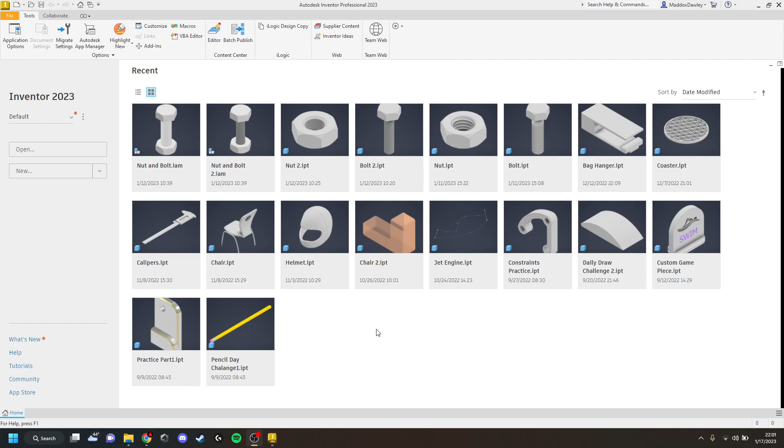I'm going to show you how to make a second nut and bolt assembly. This time it's going to be using the coil tool rather than the thread tool. So a lot of this is going to be super repetitive.

Again, you're just going to create a standard part in metric. I'm doing this in metric, you can do it in standard, but you've got to do your own math.

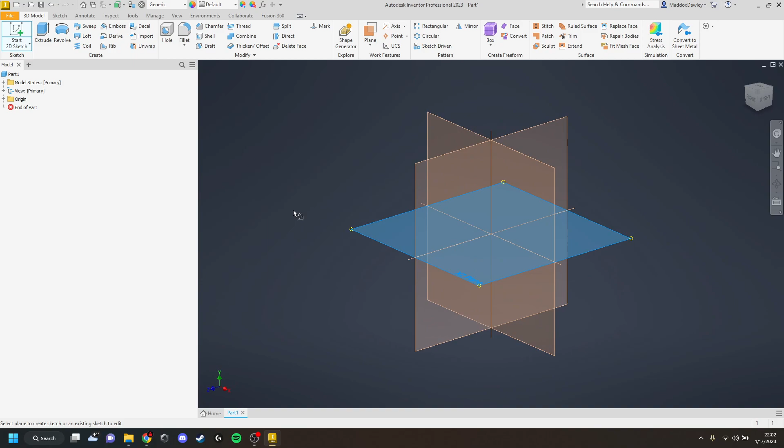So start a 2D sketch. Again, we're going to do this. We're going to make a polygon. Come in here. Cool. Done.

The dimension's going to be 19 millimeters. Finish that sketch, extrude it.

It's going to be 7.5 millimeters tall. Going to do a new sketch on the face, a circle. There.

Going to extrude, then yet again just through all there, and 45 degrees.

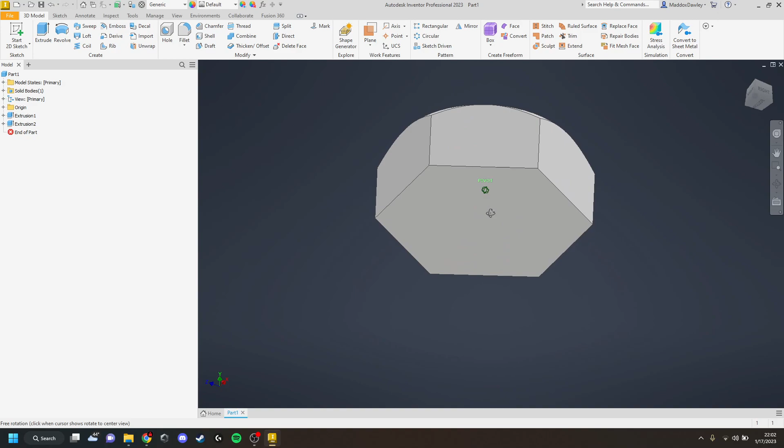Now we're going to go down to the bottom, new sketch. We're going to make a 9 millimeter circle.

A 9 millimeter circle. Finish sketch, extrude, and 40 again.

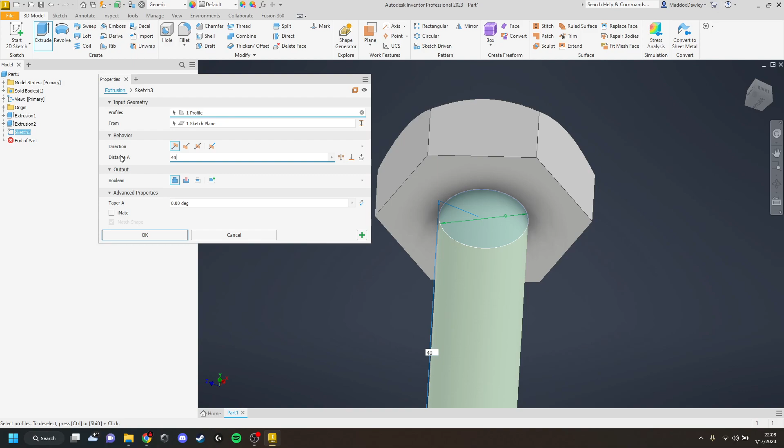So here's where the steps are going to start to differ significantly. You're actually going to do these chamfers and fillets now. So that's 1 degree there and 1 degree there.

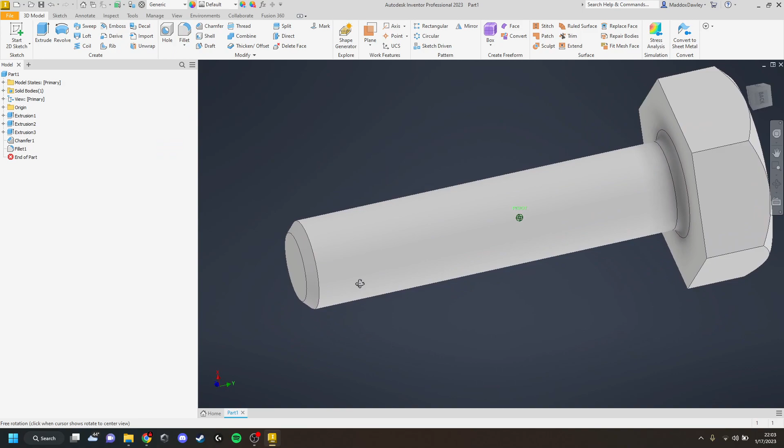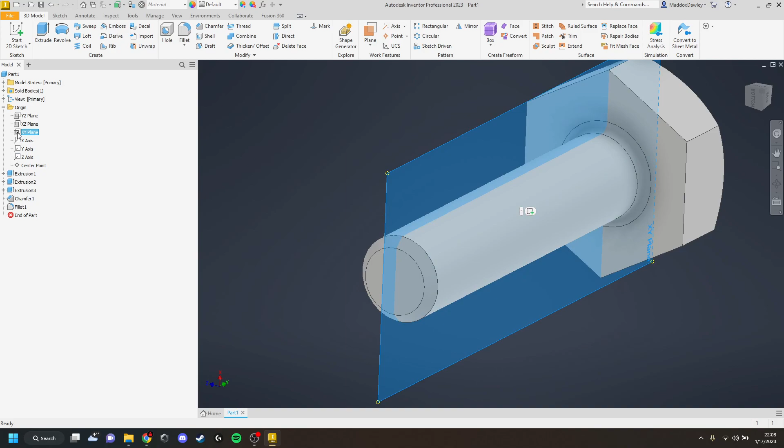There we go. Okay, so we're going to right click that, and we are going to create a new sketch on the XY plane. And we're going to come down to this end, zoom in a little bit, and you're just going to freehand an ugly little triangle.

So just going to go like that, that. Cool. Now you're going to have one more line, and it's going to go from the tip there to the center point.

Now these are actually flipped because we're working on another axis. So click that - you're going to click the horizontal constraint.

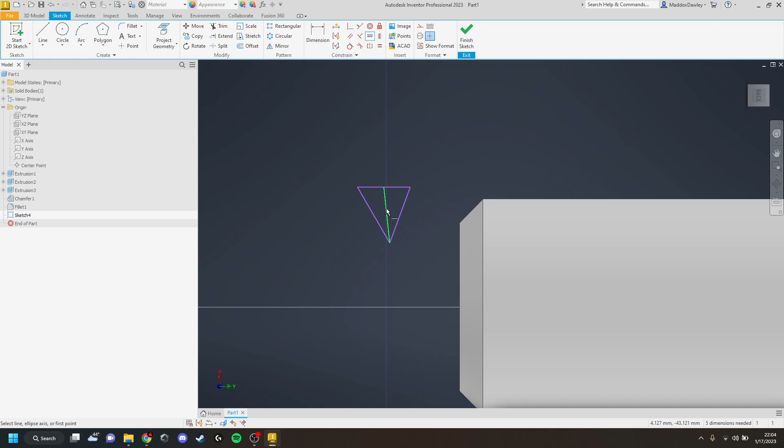So the horizontal constraint, with the way that we're looking at it, is actually vertical, and the vertical constraint is horizontal. So then this is already good.

Okay, now we're going to add one more line. This line's actually going to go from there to that corner. And then we're also going to constrain that.

Okay, so now it's time to do some dimensioning. So we need this to be 1.7.

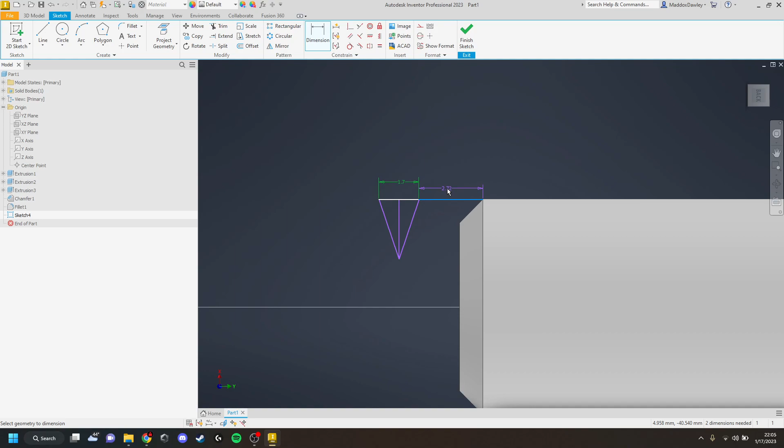This line needs to be 2 millimeters.

This angle is going to be 60 degrees, which means that we also don't have to dimension these because triangles.

Now real quick, I'm actually going to select - I'll click escape to stop dimensioning. I'm going to select this line and make it a construction line, and select this line and also make it a construction line. That just helps me visualize. It's also just a habit that you should get into.

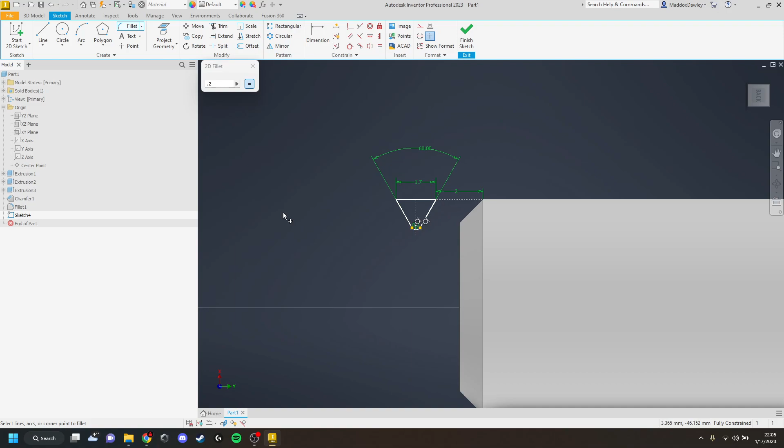I also need to fillet this, and I need this to be 0.2, not 2. We're actually going to fillet this, so you're going to select those two lines. Cool. And now you're going to finish the sketch.

All right, so now that we have that at the front, that's actually what's going to create our spiral to coil to make our threads.

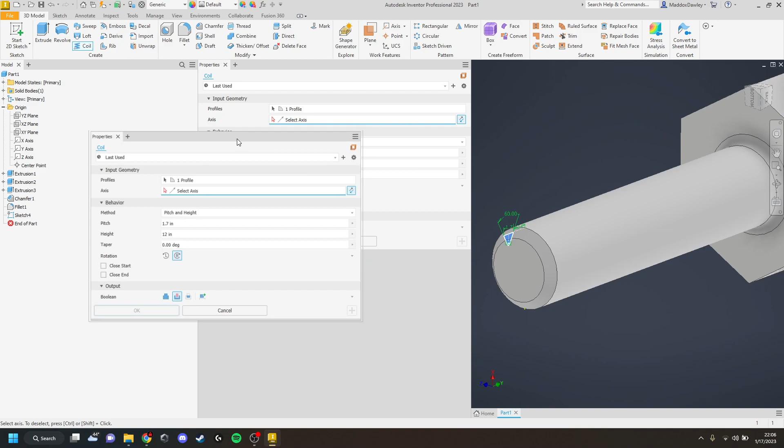So you're going to click coil. So out of the way - oh no, don't do that, please. All right, okay, so that's already selected.

So now you actually have to select the axis. The axis is going to be along our y-axis, so I'm going to select that.

And now you're going to make the height. I don't know why this is in inches.

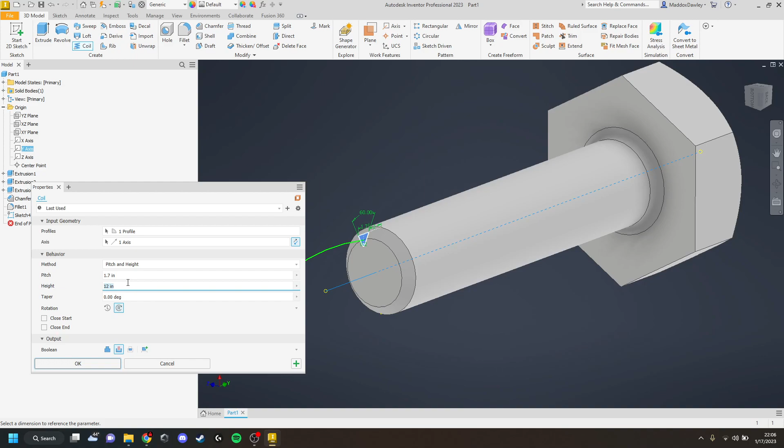Why is this in inches? That's weird. Okay, this height needs to be 40.

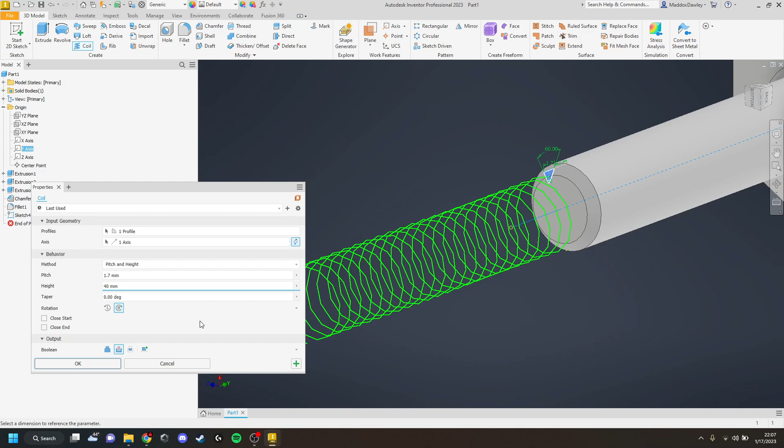So we're going to go to pitch and height: 1.7 millimeters and 40 millimeters. Now we're actually going to want this to be a hole, and I need to swap the direction. So this is how you swap the direction. Make sure it's a hole. These are all correct, so you can just click OK. And boom, you have threads.

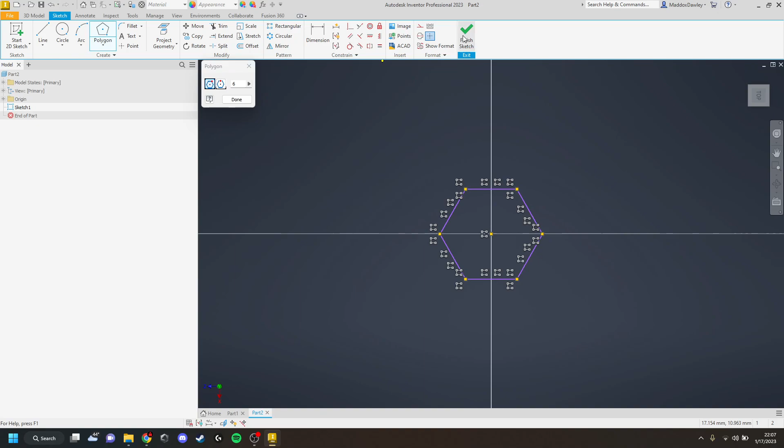Perfect. So now we're going to go home again, and we're going to create the matching nut. So again, you're going to start that sketch. Start it here. Polygon. Boom. Dimension that guy: 19.

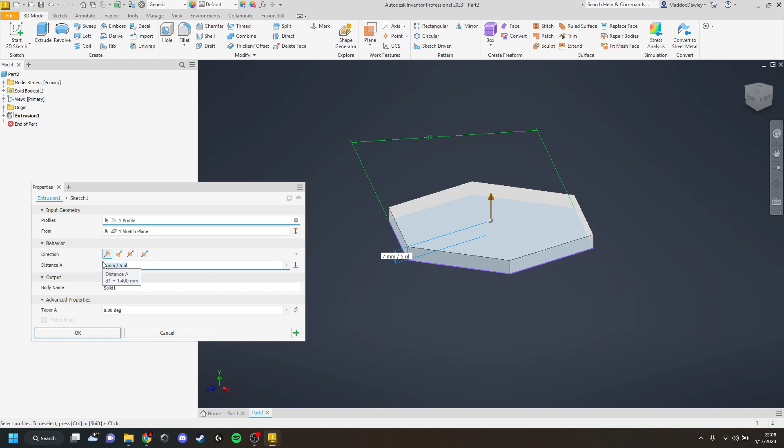This is getting pretty repetitive, but that's okay. Unless you mess stuff up, then all of a sudden it gets much less repetitive.

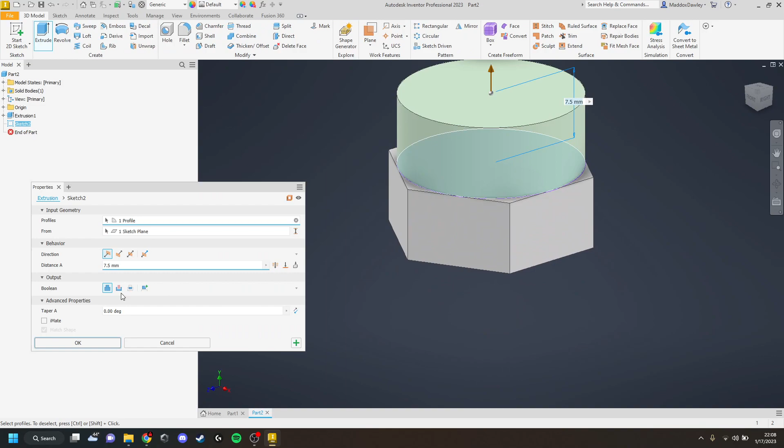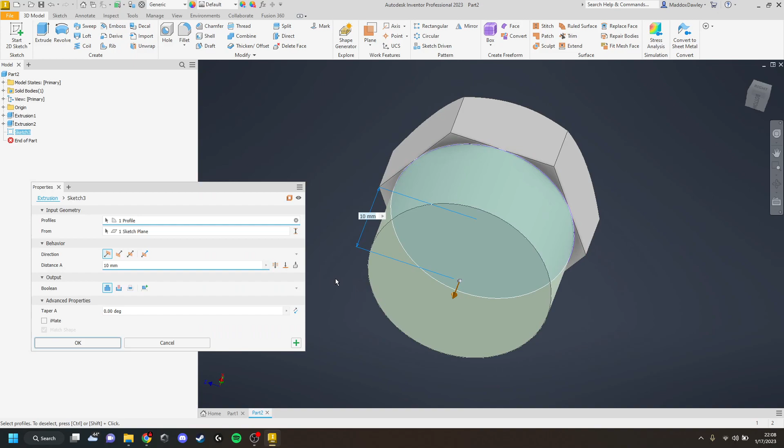This is just to show that there are definitely different ways to make things in Inventor. This style, which is using the spiral tool, is not as accurate. I don't like it as much as the actual thread tool, because the actual thread tool is giving you real thread depths, so everything is going to be accurate, but it's okay.

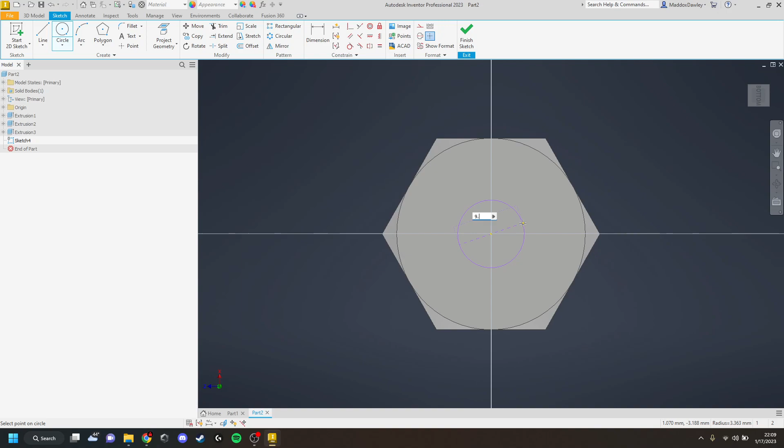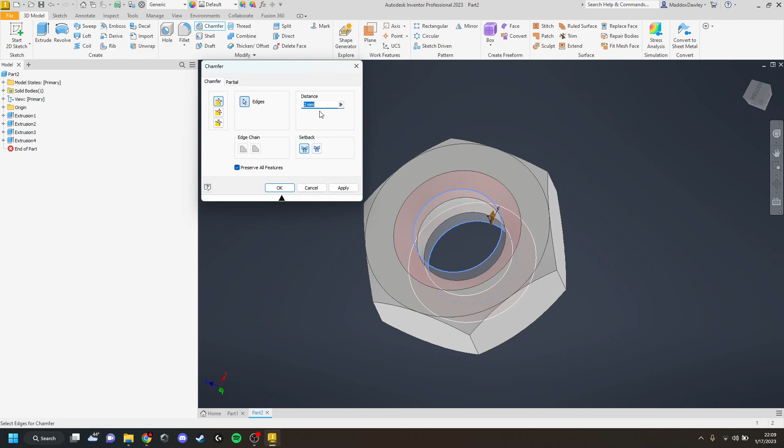So now, new sketch. Again, this circle is going to be 9.125 to take into account for tolerancing. You're going to finish that sketch. Extrude through all. Okay, so now we're going to chamfer these edges by 1 millimeter, just for prettiness.

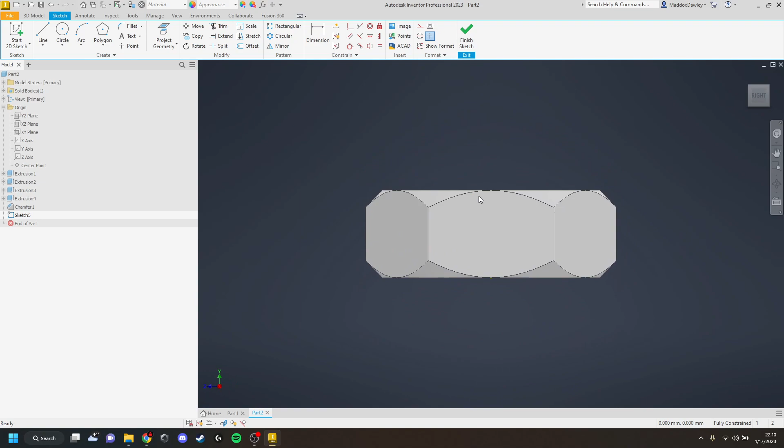And now here's when we actually do it, it's very similar to what we did on the last one. So you're going to select that XY plane, new sketch. This time, I'm actually going to rotate this to make my life a little bit easier. Let me go to my XY plane. Okay, so I'm going to create my little triangle right here.

So line, that little triangle. Exact same for everything on that triangle. So again, you're going to do that. You're going to create that going to the center point. And I'm actually just going to make the line that goes to this now.

Perfect. I'm going to turn this into a construction line, and this into a construction line as well.

These are actually correct now. Oh my god, sorry, I did this in the wrong order. You need to do it like this, so you have to keep it like this. Turn that into a construction line. Now I can do these.

Okay, this should be good. And now you can make that line, goes from here to there, right? Yes. You want to make sure that you're going to the inside of that chamfer, just to let you know. Sort of there.

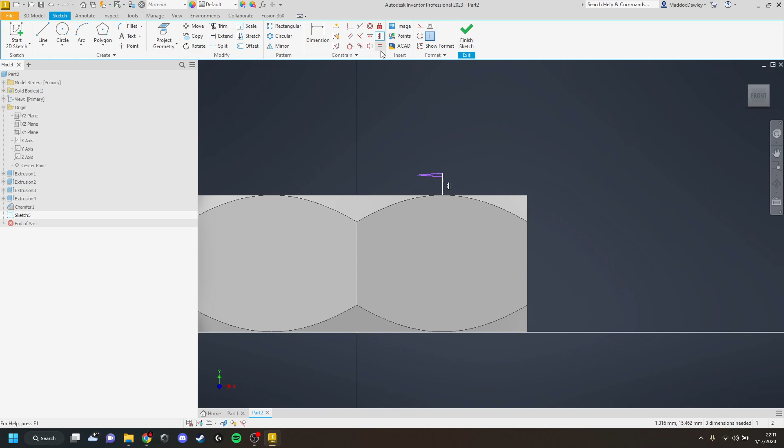Now you can constrain that. That's fine, it's going to do some weird things. You can just zoom in to actually really see what's going on. I want this to become a construction line. I don't know why this is being finicky, it's normally not that bad.

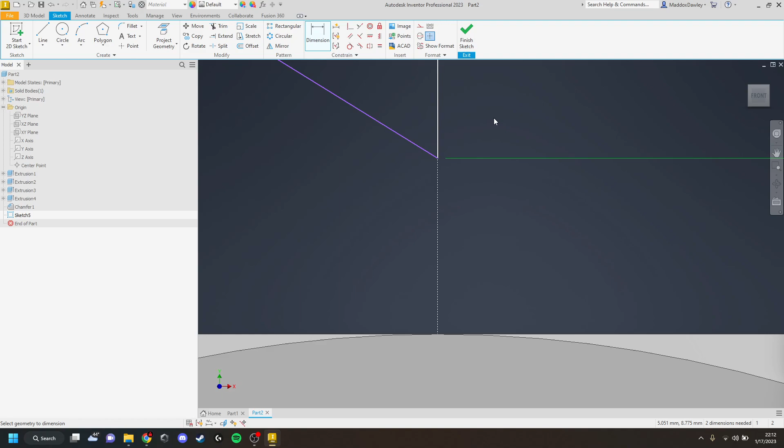So now you can dimension this to be 1.7 millimeters. And you can dimension this angle to be 60 degrees, and you can do that 2.2 millimeter fillet on the front. Now you can finish your sketch.

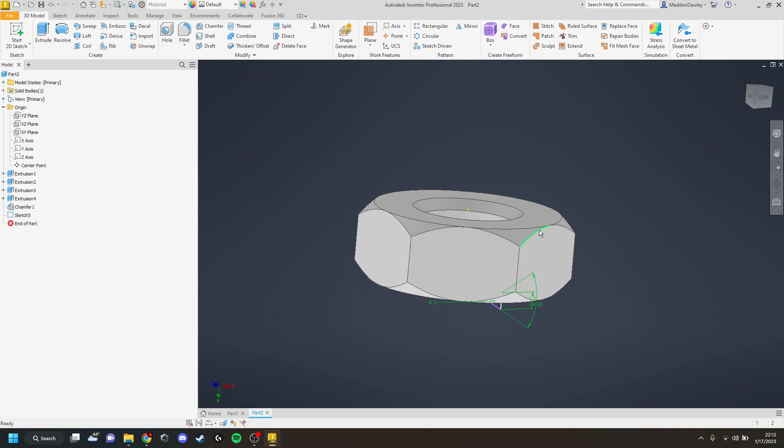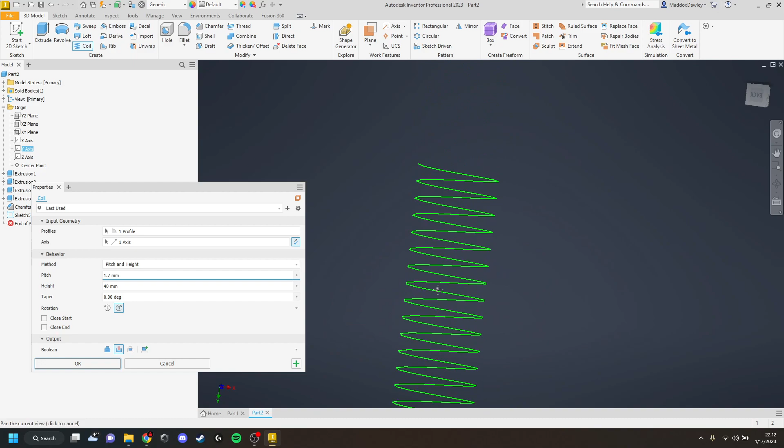Now the cool thing is that you literally just do the same coil tool, select it automatically. Just going to select the y-axis, flip it the other direction. All the things save, which is kind of nice. You can change the height, but it doesn't really matter because you have it set to hole, so all it's doing is trying to cut into material that doesn't exist there. So you just click OK. If you see, now the whole inside of this is threaded. Kind of cool.

So that's threaded. And now you actually can constrain these two together and make a rotating assembly identical to the other one, in the exact same way. So I'm not going to show you how to do that a second time.